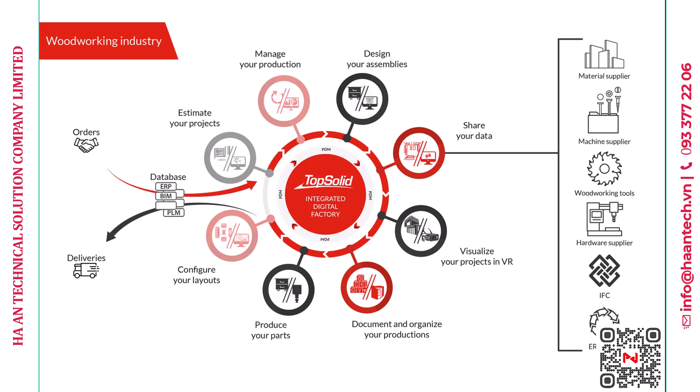So it's a unique software solution for shop fittings, like shops, stores, hotels, reception desks, offices, and buildings, kitchens as well.

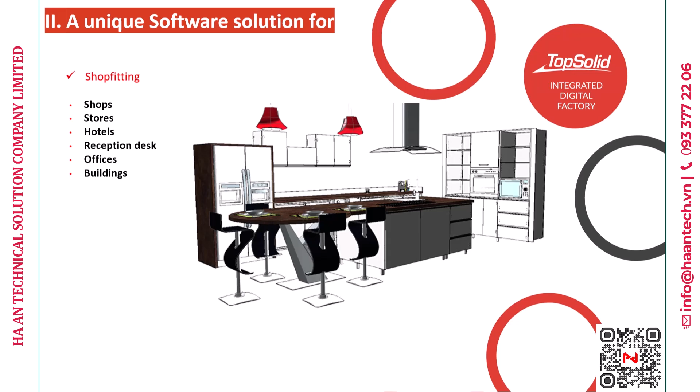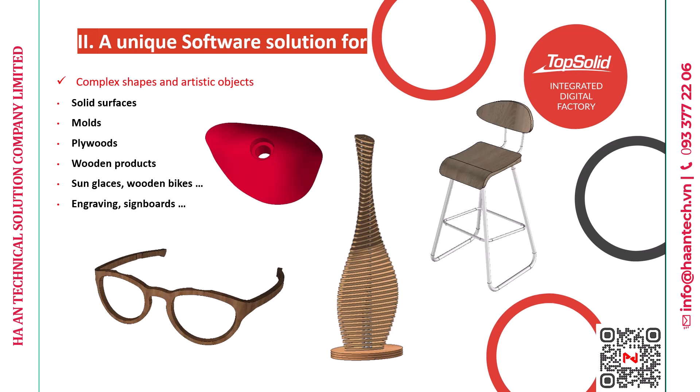For furniture, like bespoke furniture, but also cabinets like panels and solid wood furniture. For woodworking, like tables, chairs, games, custom doors and joinery, and rails. And also for specific parts and complex shapes like solid surfaces, molds, plywood, wooden products, sunglasses, and wooden bikes.

So now we will see how TopSolid can be very useful and very powerful, first through partnerships with leading hardware and materials manufacturers like Blum, Grass, Hettich, Lamello, Egger for materials, and CNC machine builders like Homag, Biesse, SCM, and more.

So first, we will see in this presentation that TopSolid is open software that allows you to import different types of format like DWG, DXF, STEP, but also to create your own environment by starting from scratch.

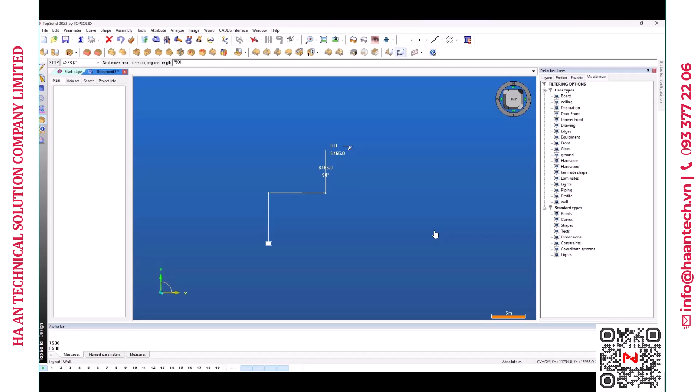So in this video, we will see how quick it is to create your own environment from scratch thanks to specific functions, so it's a wall function that we use. We can choose the thickness of the wall, the height of the wall, and we can draw just a straight line to create the building very quickly.

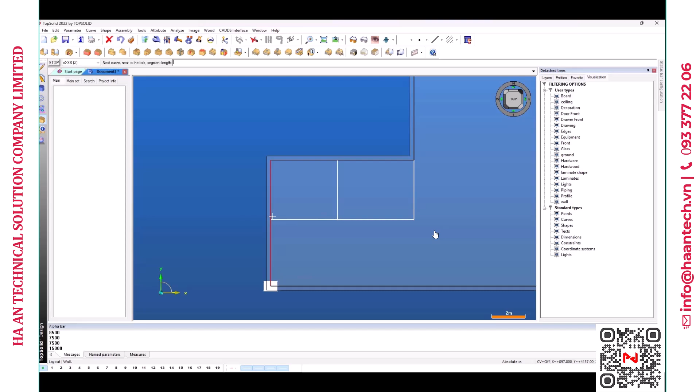Then when the room is done, we can quickly move in it, like in a game, with the mouse and the keyboard.

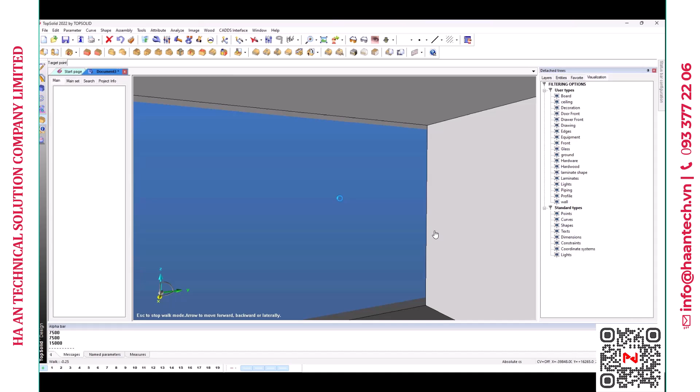TopSolid allows you to create your own components library. This allows the software to be adapted and configured according to the company's needs and know-how, because as you build your own components, you will place all the components and elements that you need inside your own library.

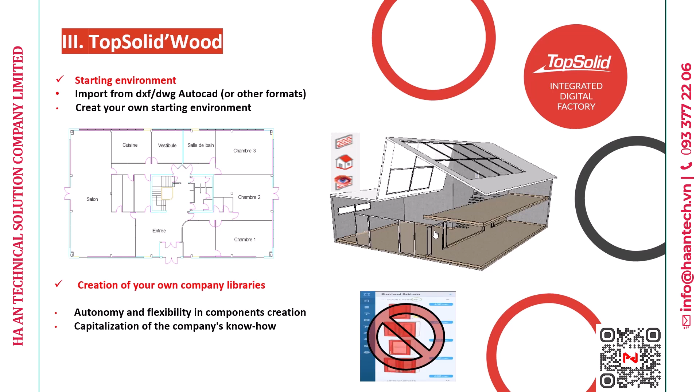One big advantage of TopSolid is the associativity, which means that the different files, 3D, draft, BOM, and CAM, are linked and updated. It's also a parametric software that allows you to draw elements using parameters so that you can quickly convert them into different dimensions if need be.

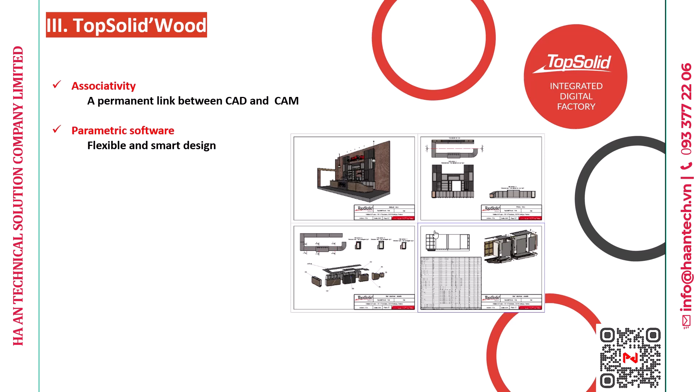Then you also have the possibility to automate certain tasks, such as creating drawings, bill of material, and cutting lists, and you also have no limit in terms of design, and you also have realistic rendering.

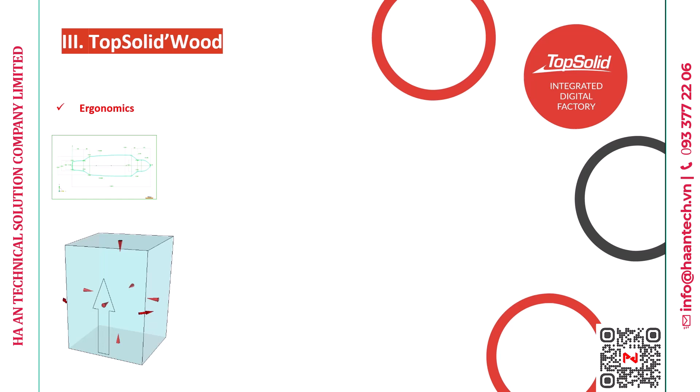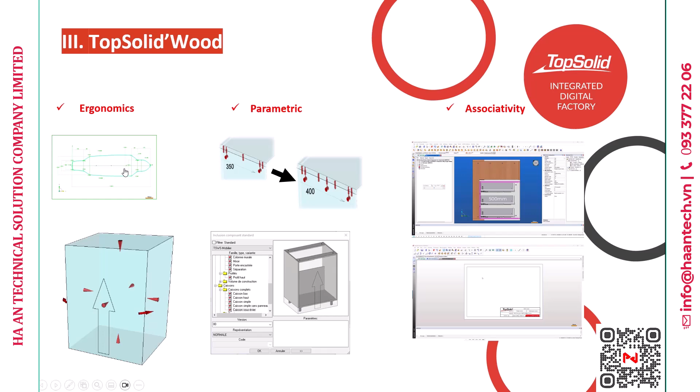So now we will see inside the video the different advantages that we talked about, like the ergonomic, parametric, and associativity features. So first we will start by drawing a TV unit. We will see how fast it is to use the sketch of TopSolid by using parameters for length and width.

So we can quickly place parameters on the sketch. We can design a second sketch to design the second side of the furniture, here's the top view of the furniture. So we just place some parameters everywhere, and when the sketch is totally constrained, the sketch goes green.

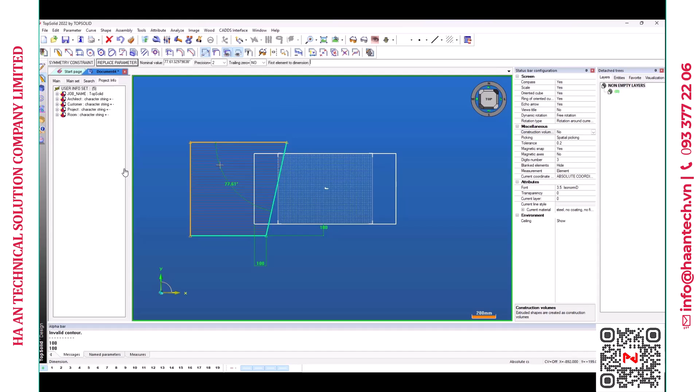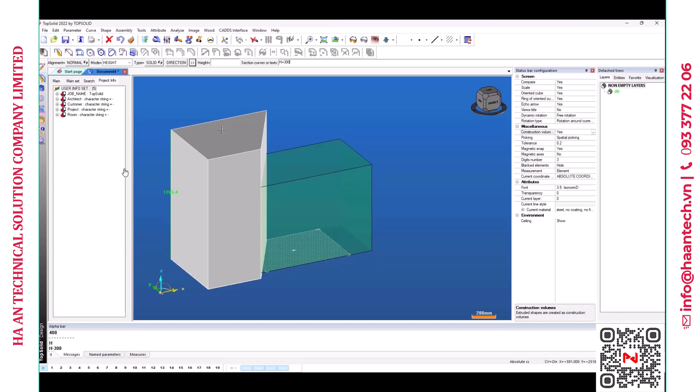Then we have the possibility to extrude the sketch with a parameter. And inside this shape, we will design the panels of the cabinet. Thanks to the construction volume function, we can quickly design all the panels that we need for these cabinets.

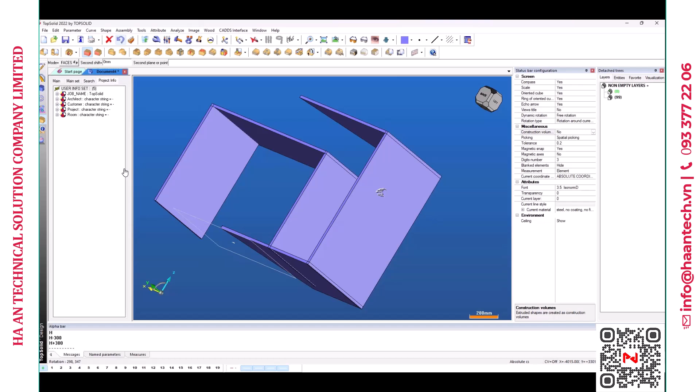So this is what we call in-place design, which means that we will design the parts directly inside the file here. And we will see that we will be able to mix it with bottoms-up assembly. When we speak about bottoms-up assembly, it means that we will include assembly inside the file or a component. So here this is in-place design, where we design all the parts directly inside the document.

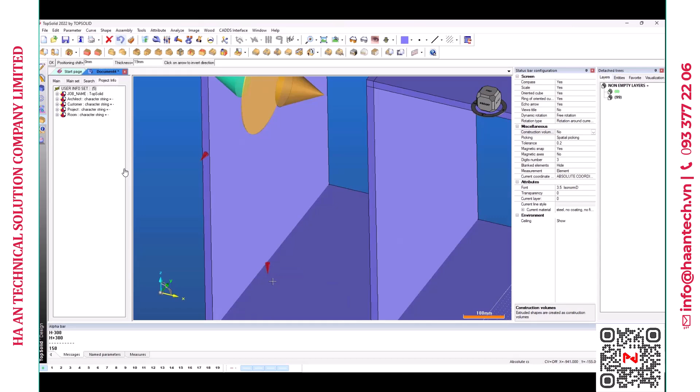So we can make some modifications to choose which panel covers which panel. Here we just reduce the side panel between the top and the bottom. That's it, so here we quickly design all the parts.

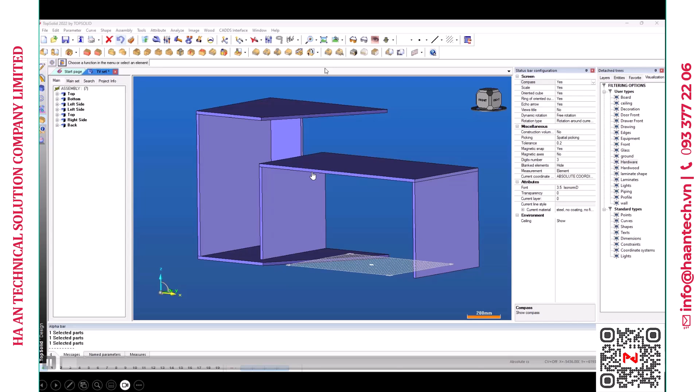So then we'll see how fast it is to assemble and make some assembly with the wood automatic assembly function. We can choose the assembly, dowels and cams, then we select all the parts, and TopSolid just places all the components.

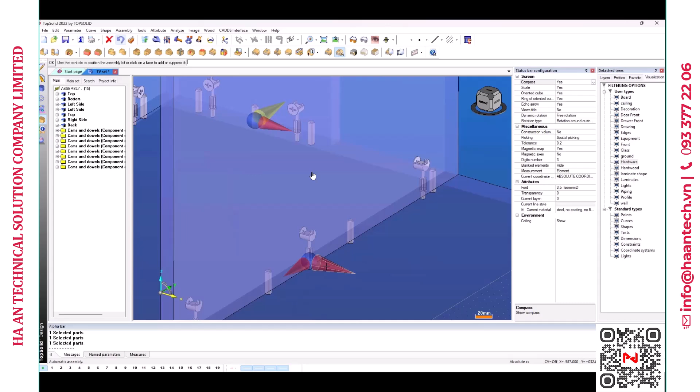We can flip the assembly and the cams if we need. And then we can also interchange if we want to go from dowels and cams to dowels. We can also interchange assembly.

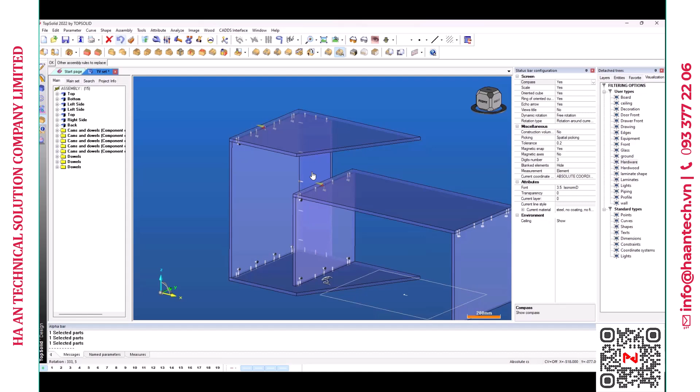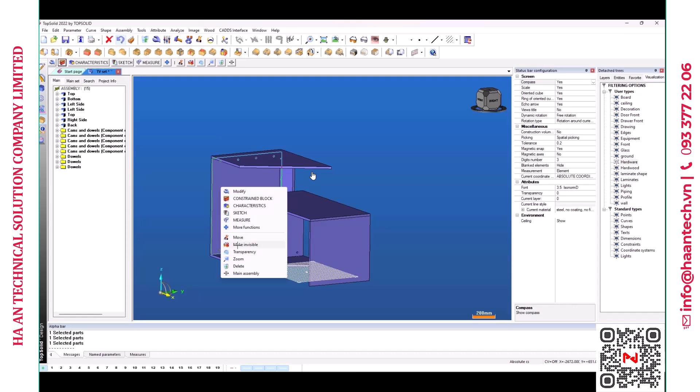When it's done, we will see that every hardware makes its own operation. So every component knows the operation it must do, and we'll have the possibility to machine it inside the CAM. Of course, this reduces the risk of error because every hardware has its own operation.

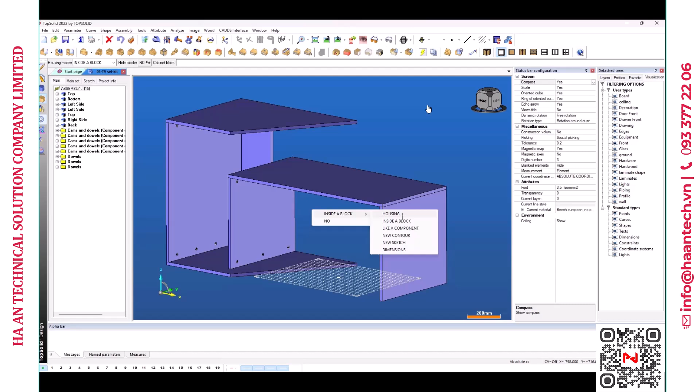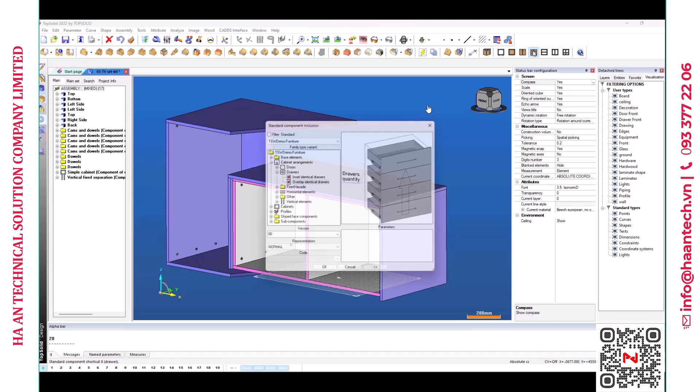Now we will see how to use components inside TopSolid. As previously said, we make some in-place design, and now we can mix it with bottoms-up assembly, meaning we can include cabinets. When we pick a face, TopSolid tries to find the opposite faces thanks to the constraint block, and is able to find the volume where the cabinet must be placed. Then inside this cabinet, we can quickly place components like dividers and drawer components as well.

We can choose the quantity of drawers, and change a few parameters if we want to change the overlay. There are some parameters, and we have quick access on the top right of the screen to specific components like shelves, drawers, and doors. So here we can place a door and select another face for the volume.

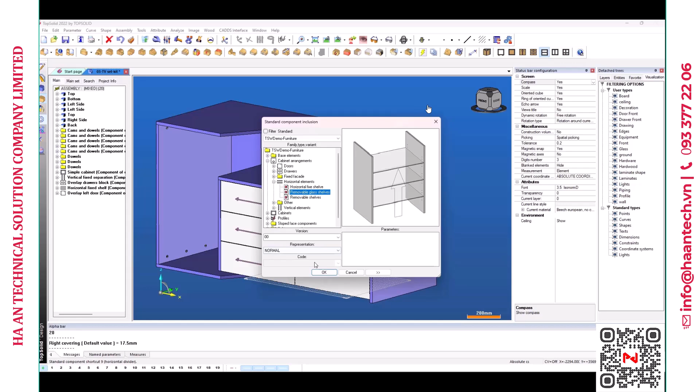This is what we call bottoms-up assembly. We can quickly place some standard components inside the assembly, like shelves, for example glass shelves. We can reconnect the position of the components between faces, choose the quantity, and we can mix this with in-place design.

If we have specific shelves to do, we can use the constraint block, because to create panels we also use the constraint block—rectangular constraint block—but we can also make non-rectangular shapes with the constraint block, like this. So we can design it in place, and then use functions to place some transparency.

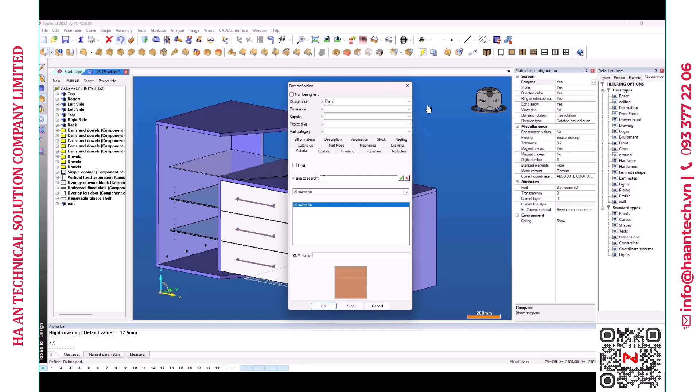We can define the parts to place a name and also a material, so we'll have all the materials of TopSolid. We can quickly search for material like glass, and find the right material.

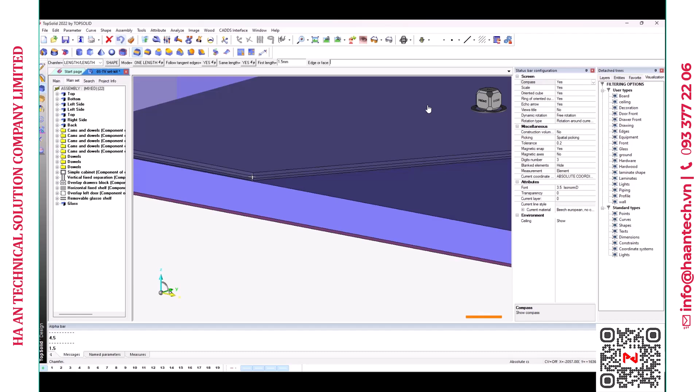We can also use design functions like chamfer if we want to make a chamfer on the shelf, also on the corner.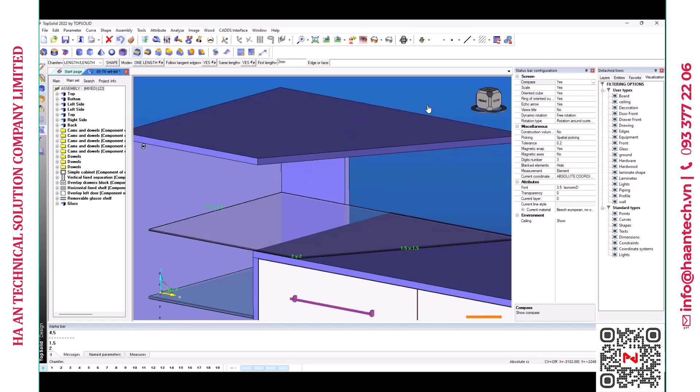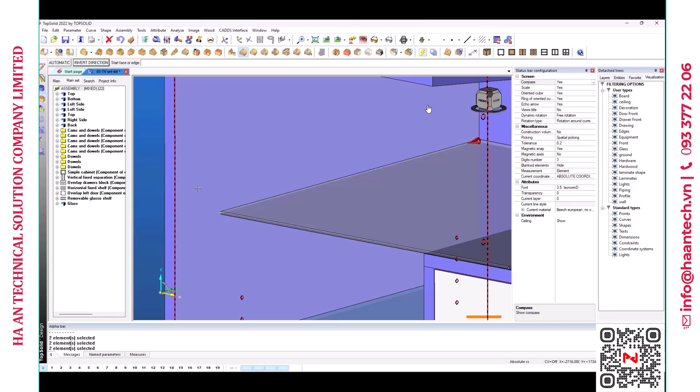We can use an assembly function, and use a specific assembly like shelf supports or glass supports. We can quickly make the assembly between the shelf and the side of the panel. We can also define the position of every element, and then TopSolid places the supports and makes the operation for the support.

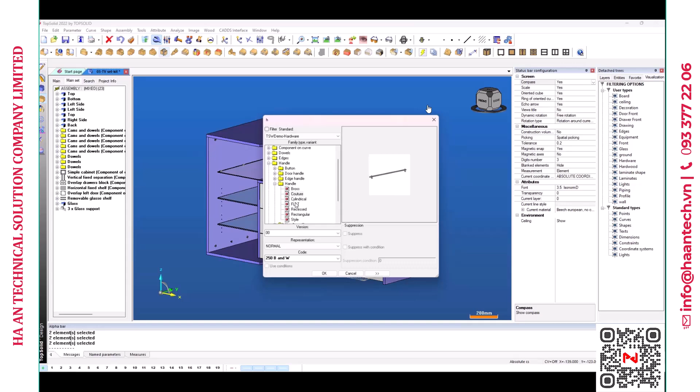We can also interchange subcomponents if we want to interchange the type of handle for the drawers, and we can do the same for the door. So TopSolid is able to interchange the subcomponent of a component. This is for the mix between bottom-up assembly and in-place design.

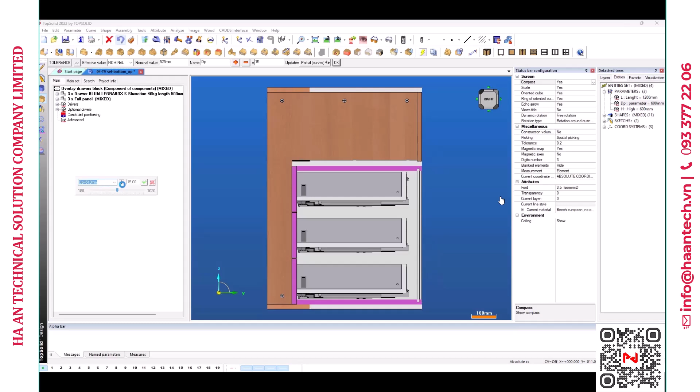So it's an associative software. If we change a dimension—for example, the depth of the cabinet—we will automatically choose the good drawer with the good runners. This is associativity between elements inside the 3D. But when we speak about associativity, this is also associativity between files, so between 3D and a draft, and also, as we'll see, between 3D and CAM.

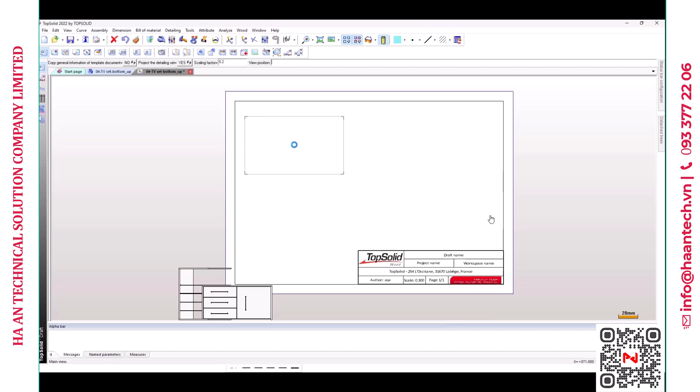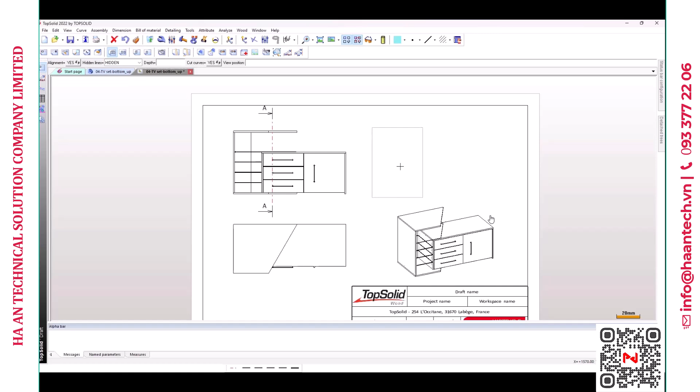So here we'll see how to make the drawing. The drawing is just the result of the 3D, so this is not the most complex part of the software. As long as you have the 3D, you can quickly generate the top view, the front view, the 3D view. You can also make sections inside the draft, and make detail views if you want to highlight a specific detail inside the drawing.

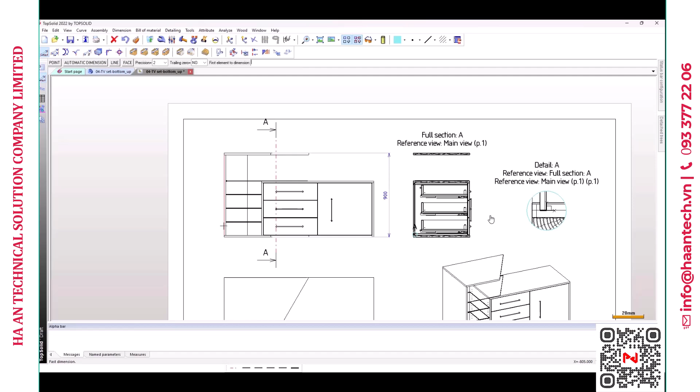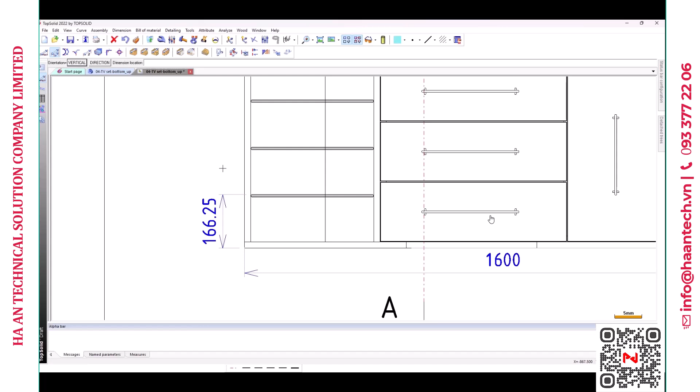Of course, we can place dimensions, so manual dimension like this, and we can also make what we call composite dimensions between elements, with several types of cumulative dimension. You can place dimensions also on the detail view, and place specific dimensions for wood operations, like the groove, with the tools we use and the dimension of the groove.

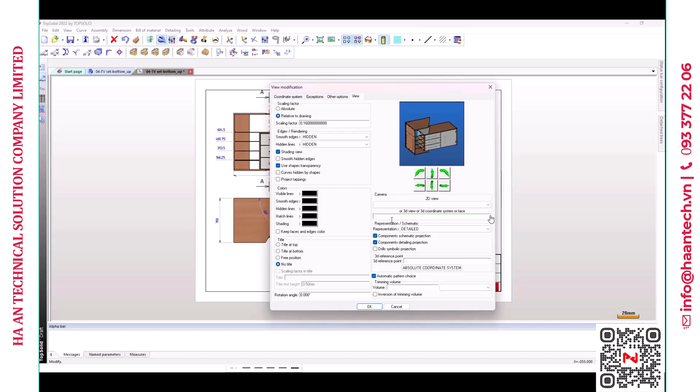You can also work with the realistic rendering of the color of the material directly inside the draft. And inside the draft, we can use the orientation of the 3D directly to create a view.

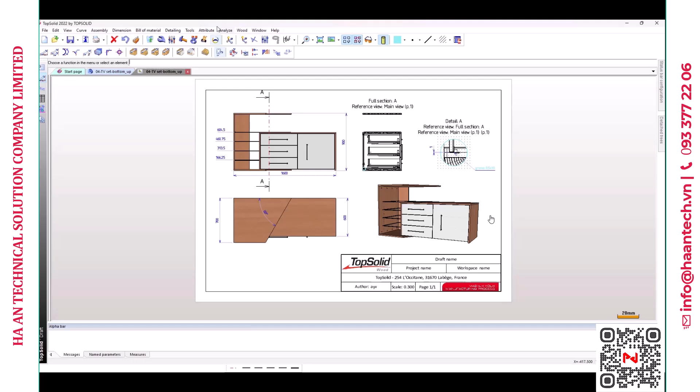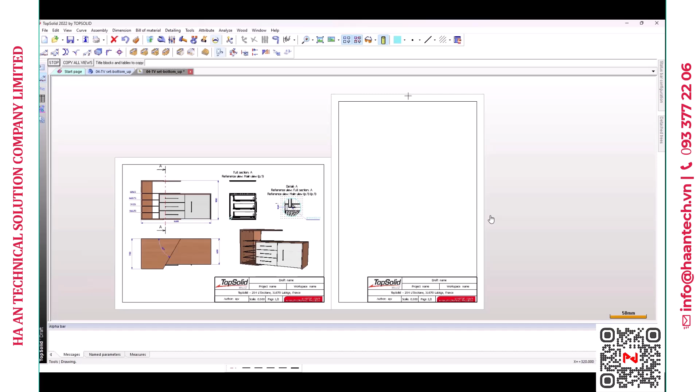Then we can add a new drawing inside the draft document, and change the paper format. Inside this page, we will create an exploded view and a bill of material. So we can quickly go inside the 3D, make the exploded view, then go back inside the draft.

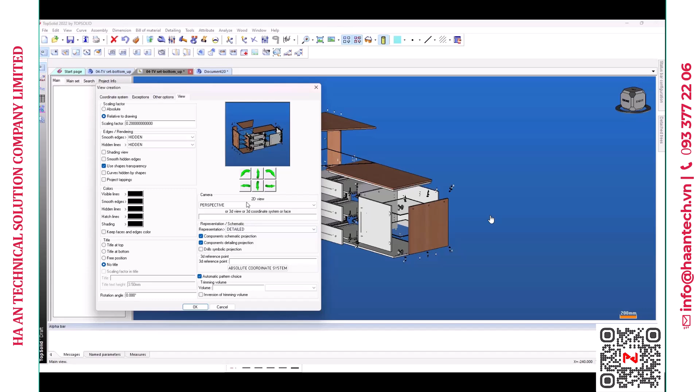We can choose the orientation of the 3D, and then place it directly inside the draft. Then we have the possibility to create a bill of material inside the draft, and place a number on every part.

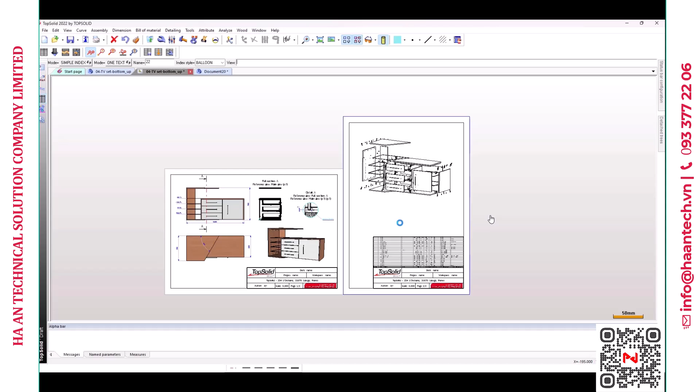So here we just place the bill of material, a list of all the parts of this assembly. Then we can have the number of every part, the quantity, the material, and the dimension of every part inside the bill of material.

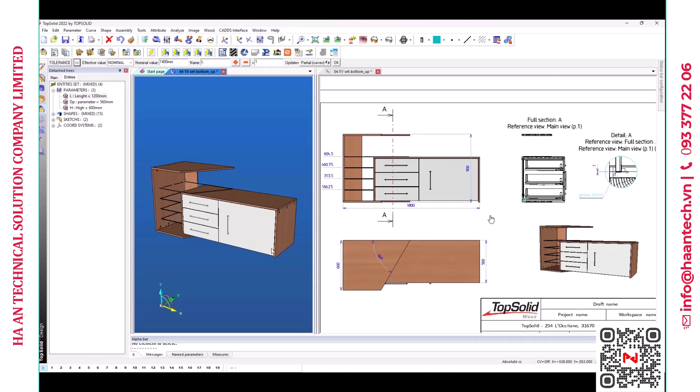Now we will see the associativity. So we have done the drawing. If we change the parameter inside the 3D, so if we modify the length, the cabinet from 1200 to 1400, TopSolid will update all the drawing, updating all the dimensions inside the drawing and also inside the bill of material.

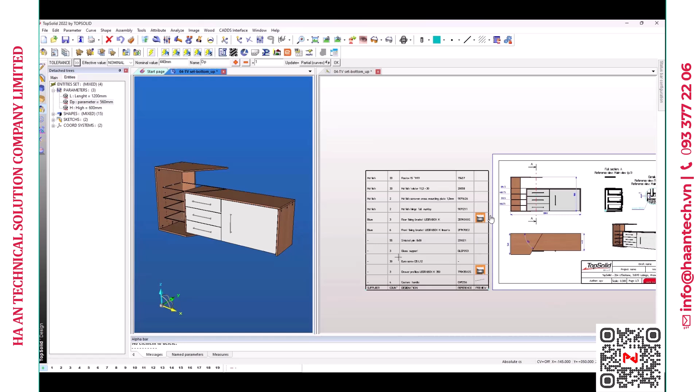So here we change the depth of the cabinet. We will see that we also change the reference of the runners for the drawer. So we update the drawing and we also update the bill of material. That's why we speak about associativity.

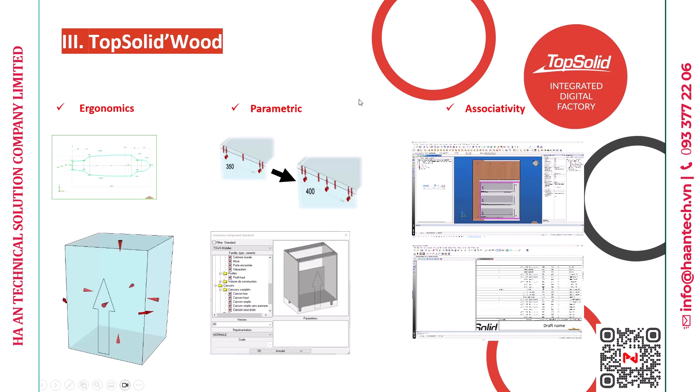It's good software in terms of management if we have some modification to do. So in this video, we'll see that we can quickly change materials inside the assembly. For the panels, we can quickly change the material, and then all the panels in Beech European will go with a thickness of 19.

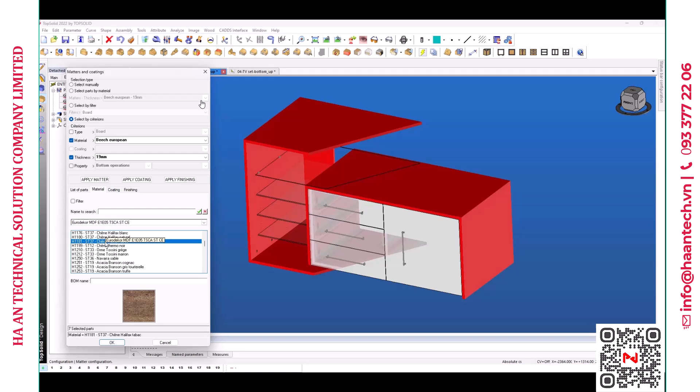We have several filters. We can change another material if we need, and go inside the Egger collection, for example, and then select the material and apply.

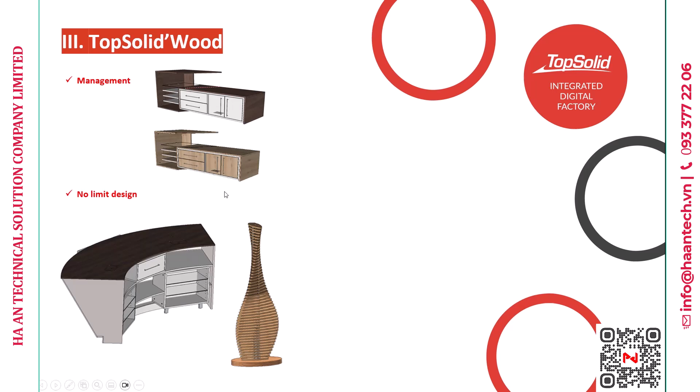We'll see also that we have different functions, and that TopSolid is not only useful for cabinets, but can also make complex elements. So TopSolid is also able to make, for example, unfold parts. So if we need to unfold plywood, for instance, TopSolid is able to do it.

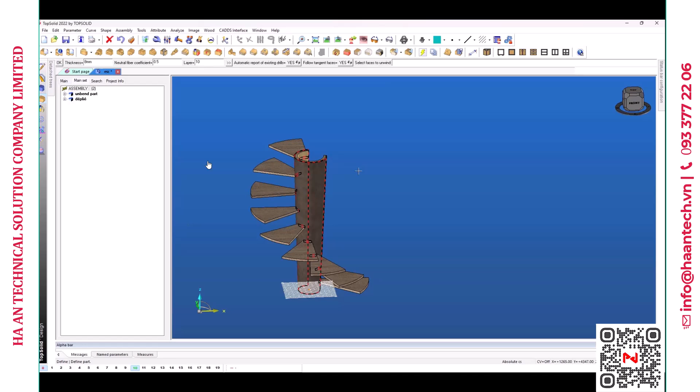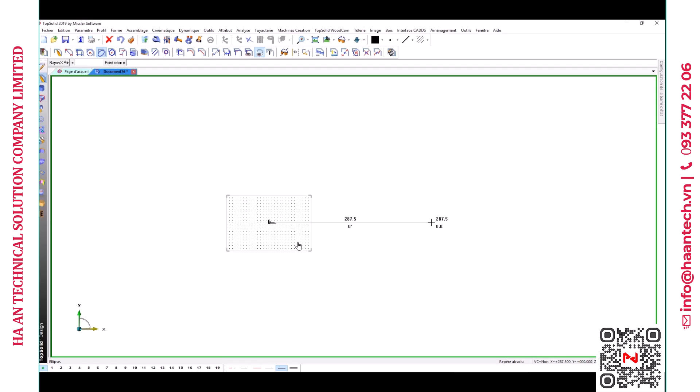There are also other functionalities to deform some parts, so we can design a part, and there are design functions to make complex faces, complex parts, and complex surfaces. We have several functions to extrude a sketch, of course, and then a design function to bend some parts. So we can unbend or bend parts with different functions.

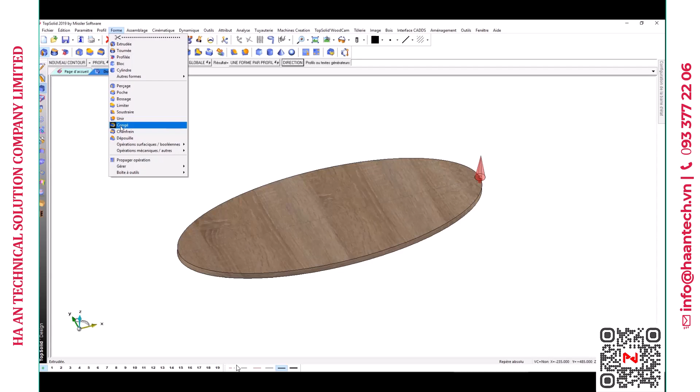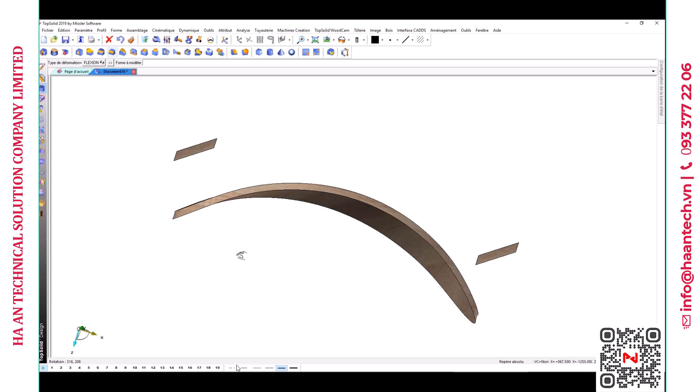So just to show that we don't have any limits in terms of design, and TopSolid is not only dedicated for cabinets or simple panels.

Then there is also the realistic rendering, which is also an option of TopSolidWood.

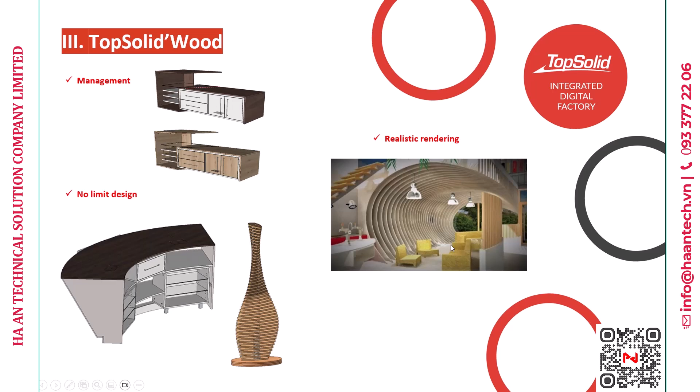Now we will speak about the wood CAM. This is the CAM side of TopSolidWood. TopSolidWood CAM is able to machine all materials, so it can be used for panels, solid wood, solid surfaces, of course, plasters, and more, from 3 to 5 axis machining with clash management.

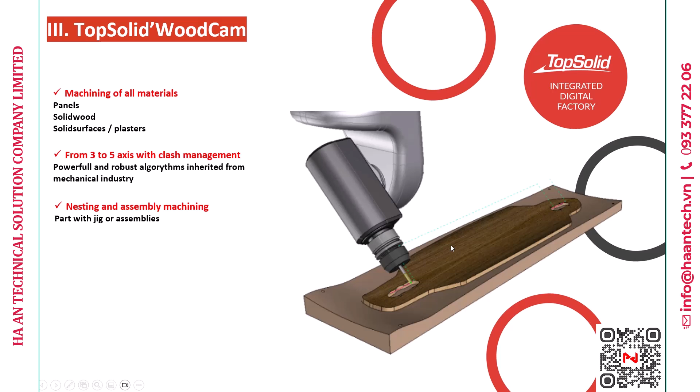Possibility to machine parts, of course, nesting and assembly. Manufacturing process optimization, meaning automatic generation of CNC files and workshop documents. Also machine accessories management, such as aggregates, pods, vacuum tables, hood. And there is a safe and accurate simulation inside TopSolidWood CAM.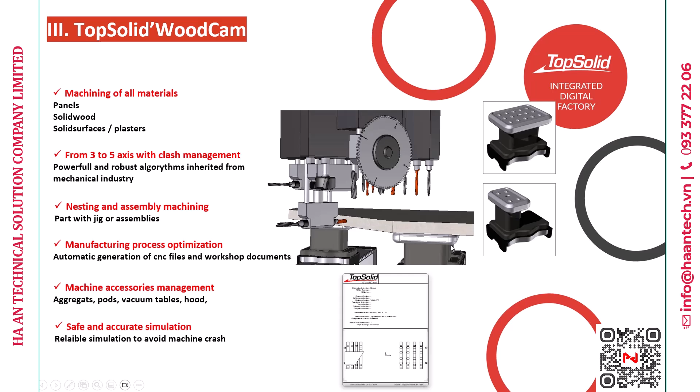So we will see the integration with the CAD inside this video. When you have done all your parts, inside the same interface - this is a big point for TopSolid - we have the CAD and the CAM, so we can quickly place the parts designed inside the CAM on the CNC machine.

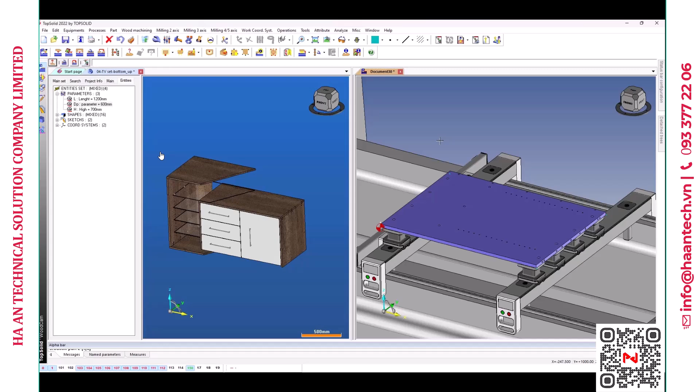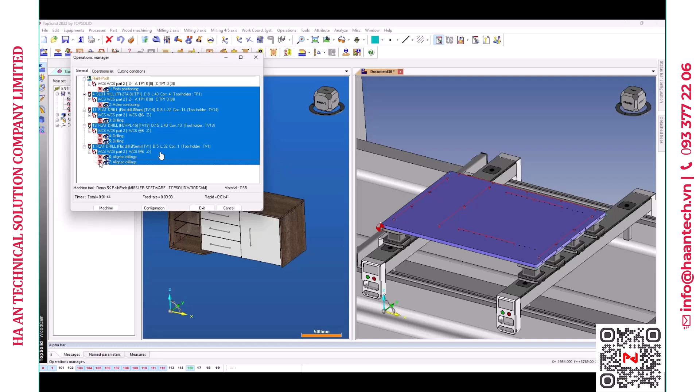And then for simple operations like 3-axis operations such as drillings, groove, rabbet, and pockets, TopSolid is able to find and automatically analyze all the operations that come from the CAD. So we can analyze all the operations, and then we can simulate them. We have a 3D simulation for every operation directly inside the CAM.

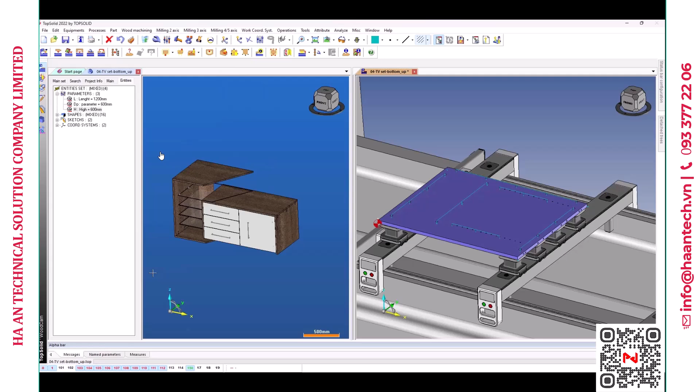We also have associativity between CAD and CAM. So if we change a parameter inside the CAD for the height of the cabinets, if we go from 700 to 600, TopSolid will update the CNC program. We'll just have to regenerate the CNC program, and TopSolid will reanalyze every operation that has been done previously. We can make the simulation if we need, and generate the ISO file thanks to the post processor to send to the CNC machine. So this is to explain the associativity between CAD and CAM.

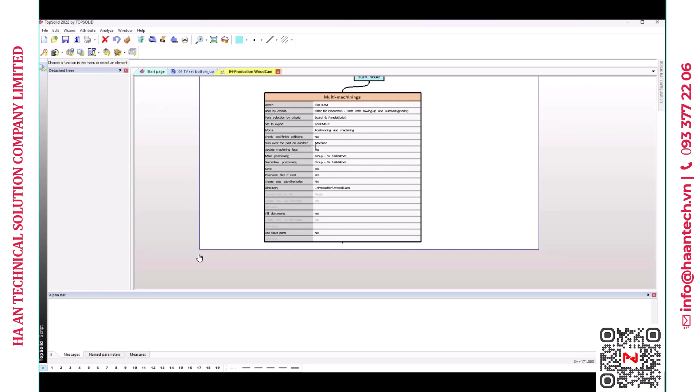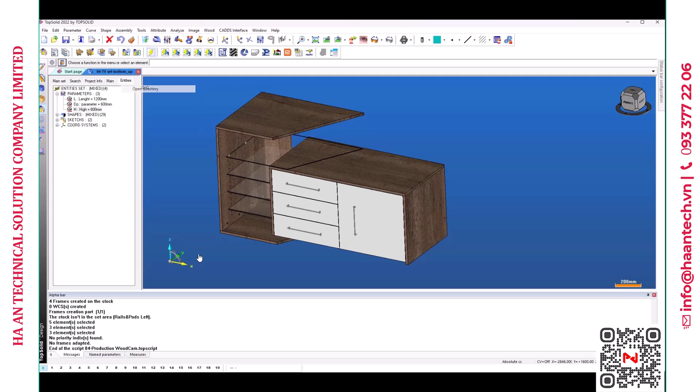But of course, for this simple task like 3-axis machining, we have the possibility to automate the generation of a CNC program. We can make a script inside TopSolid that will select all the parts and panels that must go on the CNC machine. In one click, we select the script, and TopSolid will generate all the CAM files depending on the selected parts, place the parts, the rails and pods, and place the part on the CNC machine, generating all the CAM files in one click.

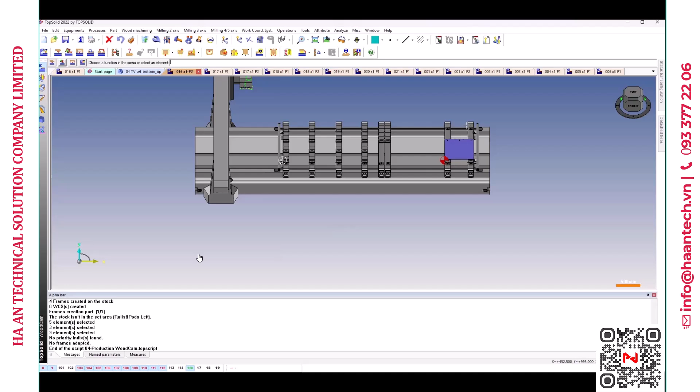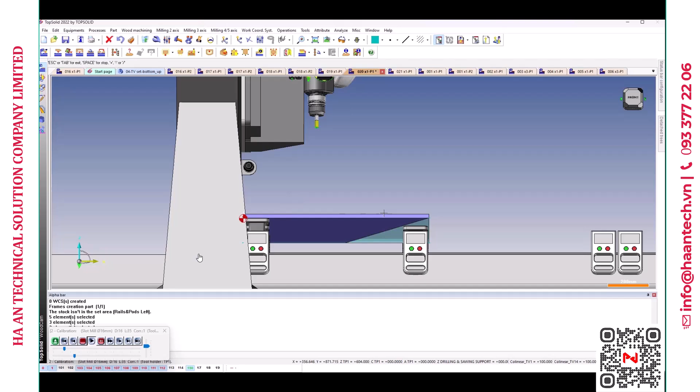So TopSolid generates all the CAM files, flipping the part if need be. Then every CAM document can be opened, and we can also make the simulation if we want directly in the CAM program, and then generate the ISO file if needed.

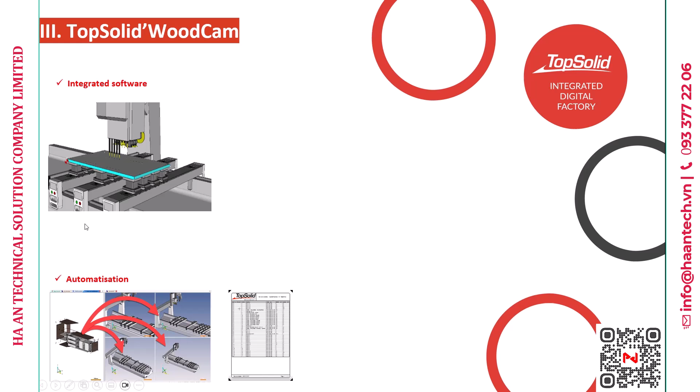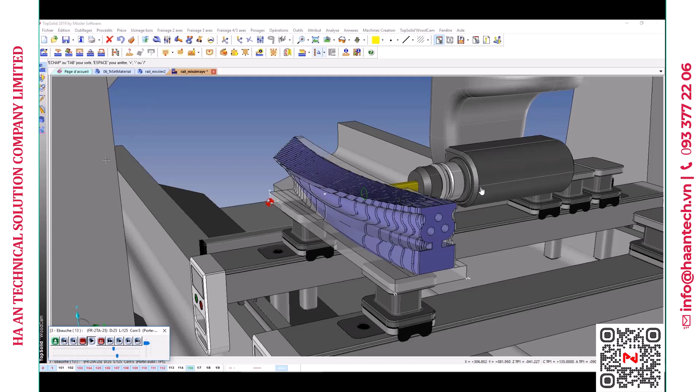So TopSolidCAM is able to go from 3-axis to 5-axis machining. We can also make more complex parts for the CNC machine, and we can analyze and create all the trajectory from 3 to 5-axis machining to create parts like handrails and stuff like this.

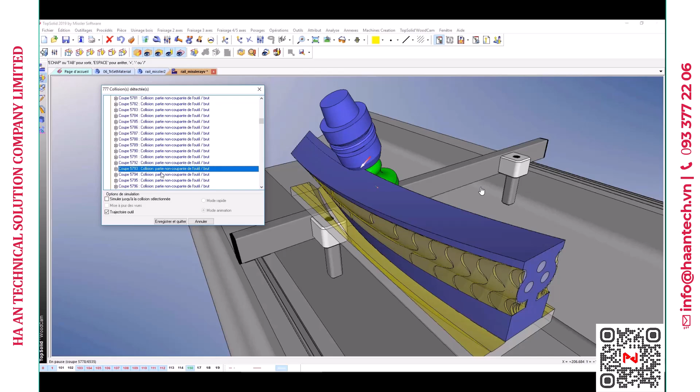So TopSolidCAM is also able to analyze collision. We can see all the collisions detected here. We'll see for every collision, let's say an error, which shows every collision for every trajectory. So in this case, we will be able to change the tools properties to avoid collision.

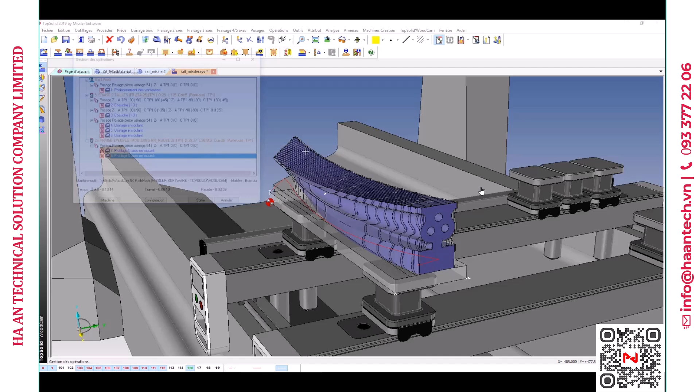We can go inside the tools management, and then change some settings. And then if we analyze and regenerate the program and analyze collision, we'll see that now there is no more collision.

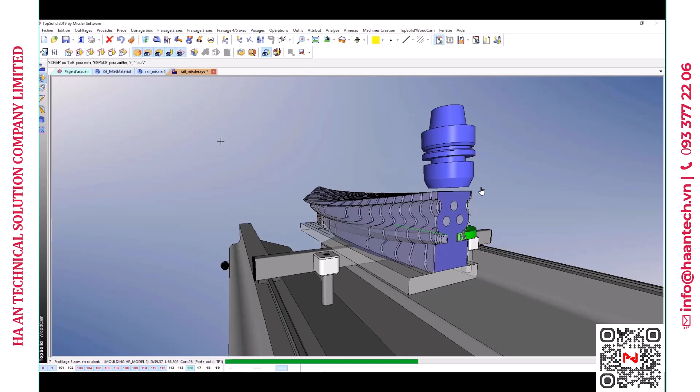So just to show that TopSolid is also able to drive 5-axis machines. So that's it for this presentation.